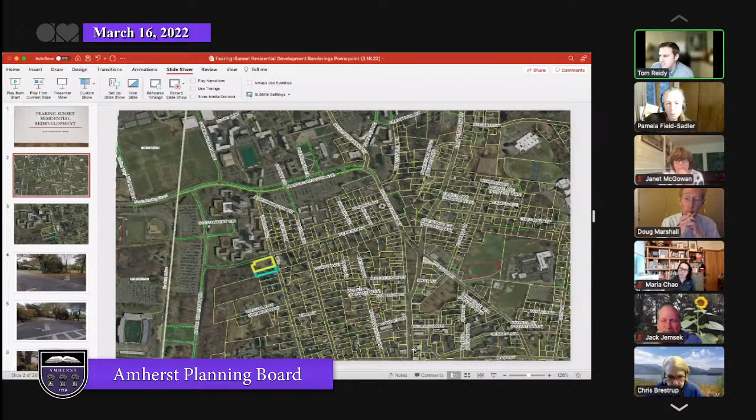Sunset, 164, 174 Sunset Ave. Just to orient everyone, 174 is the yellow highlighted, 164 Sunset is the blue. You see UMass campus here, football stadium here. You've got Kendrick Park, the Amherst College football field, and downtown is right here, just to give you a sense of context.

And then just a close-up of what we're talking about. Creamery building over here. This is, I believe, a 5-unit condominium. And then you've got single-family homes on relatively smaller lots, and it's a dense area. And then you've got the university just to the north.

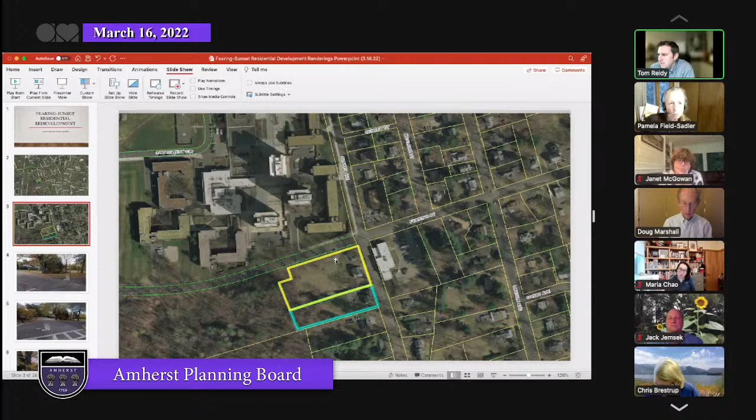Further back in the woodlands, there seems to be a lot of invasive species. There are no wetlands on the site, no wetlands proximate to the site. So we've had a wetland scientist go out already and provide a letter to the Amherst Conservation Commission and Erin, suggesting that nothing more would be needed, and she accepted that. She had been out there, or at least had done the desktop review as well.

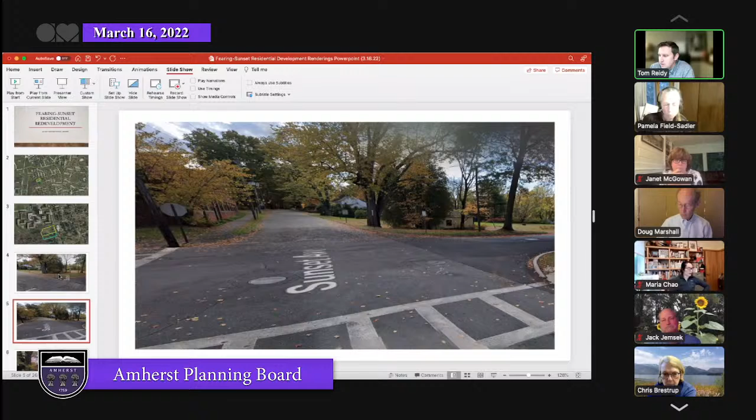This is looking northwest. So this is looking at 174. You see the towers in the background. The Creamery is over to the right of the screen.

This is taking that same position and just pivoting and looking to the southwest. You've got 164. This is a non-owner occupied rental as well.

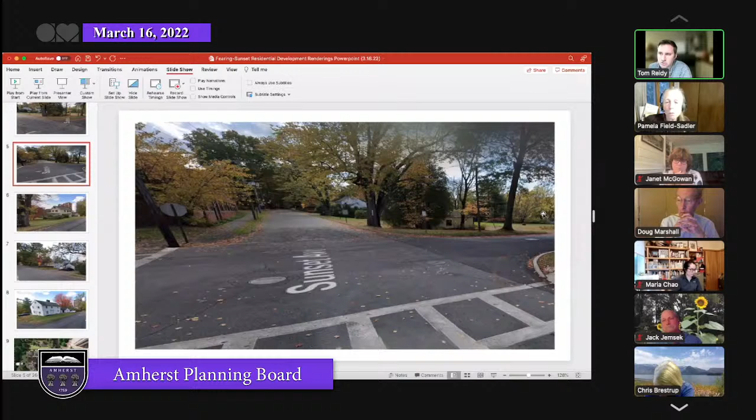This is just a little further to the south, looking northwest. You've got 164 and 174, and then you've got the towers in the background. Most of it is cleared. There's some vegetation towards the back. There are a couple of shade trees, and we're working our way through the public shade tree committee and working with Alan Snow, the tree warden.

Part of what we had represented to the local historic district commission, and which still holds true, we will ultimately be submitting for a demolition permit insofar as we're looking to take down this garage and this breezeway, and this garage, and then there is a porch on the back. We were looking to take those down or off, and then looking to relocate these houses.

You may remember Barry had moved an Amherst College house from South Pleasant Street. Its new location is now at the corner of Snell and Baker Street. So Barry would be using the same building movers to move these houses.

We haven't settled on a location yet. We've got a couple in mind. Once those become final, then we'll let the public know, because there's a lot of coordination that has to happen with the utilities, with the police, if we're traveling on any state roads, with the state police, Mass DOT, etcetera. So we haven't finalized those yet, but we expect one to hopefully be in Amherst and one to be in Hadley.

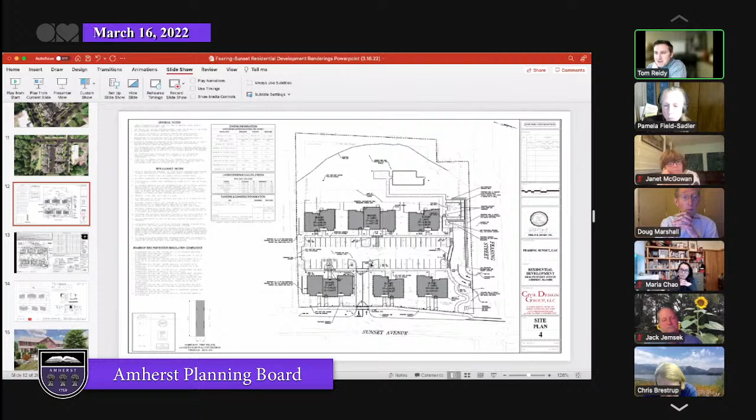I've got the site plan if folks are interested in seeing it. Compared to the colored renderings, with all due respect to the engineers who I know are here, it's a little blasé. I'm happy to dwell on it if you like.

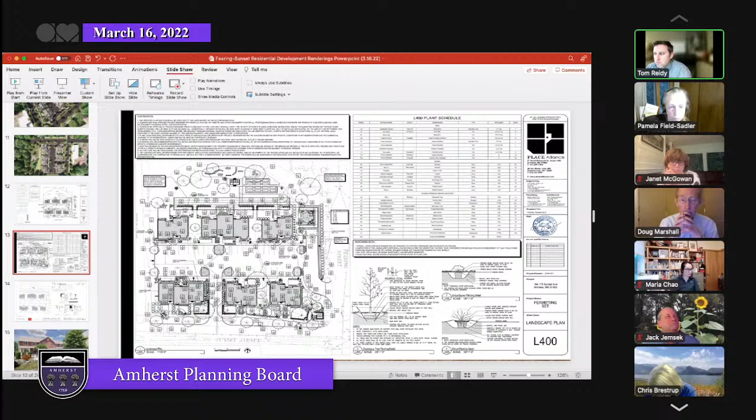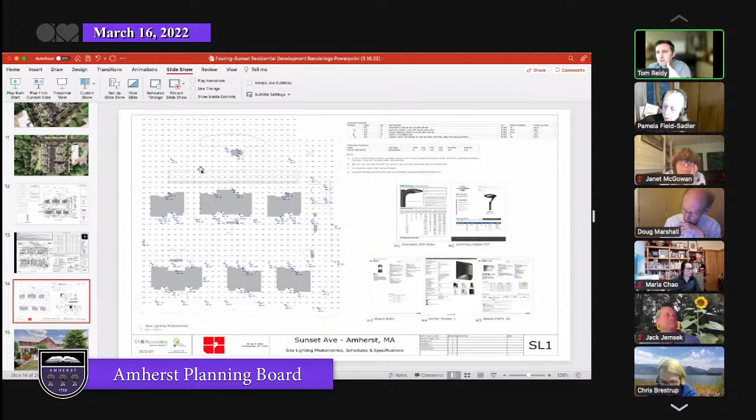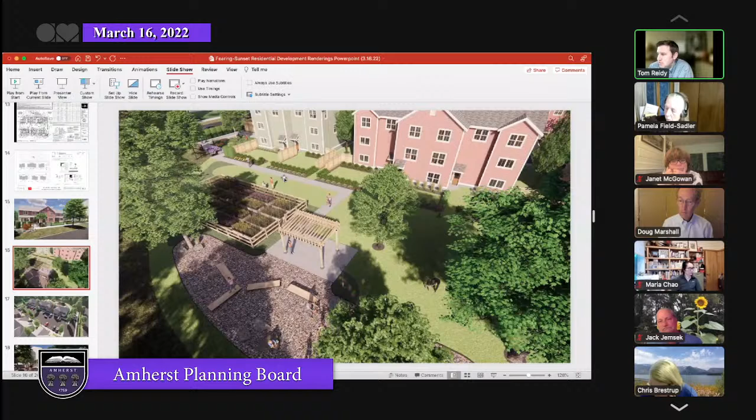Here's a view all the way to the west, looking back east. You've got that natural play area we talked about, the pergola sitting area, community space, and fences in between these units. Then some outdoor grass play area, and the backyards. To the north you can see the arborvitae and the wrought iron fence. You've got one of the parking areas, the loading area, and a retaining wall here because the site dips down from the surrounding grade.

Another photograph of that natural play area in the context of the towers in the background. Again, this one is at the southerly side of the property, along the parking area.

So the duplexes are proposed to have 4 bedrooms each. Jonathan will talk about that a little more. I mentioned that 5-unit up along Sunset—this one has 4 units. It's got a 2-bedroom above a 2-bedroom in the middle, and then 4 bedrooms on each side. The duplexes that flank it each have 4 bedrooms.

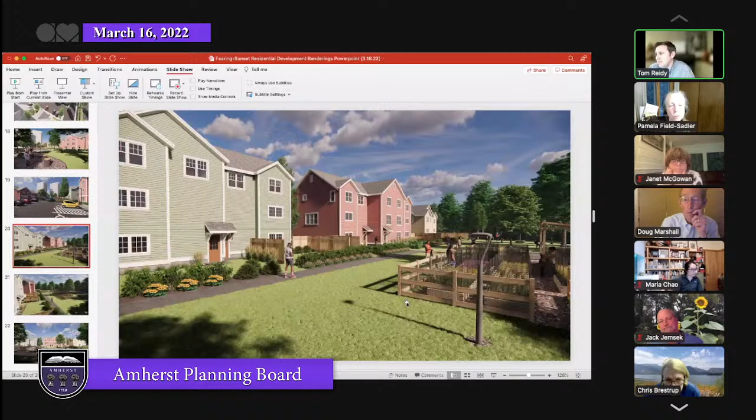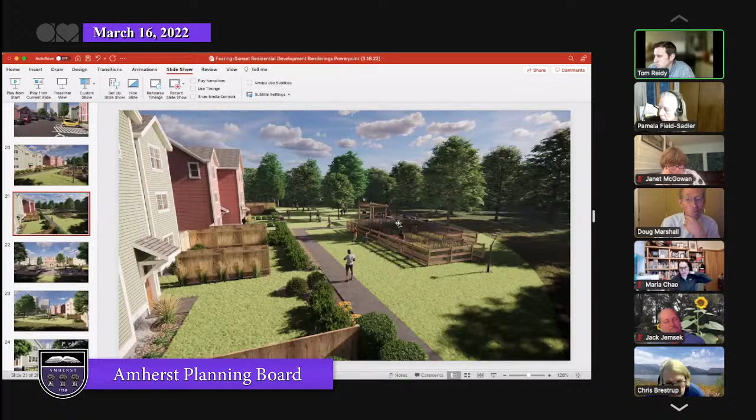Again, this is from the north looking south, the community garden, and these are the types of lights we're proposing. Looking out towards the rear there's the community garden, pergola area, and fenced-in area with the plantings being proposed.

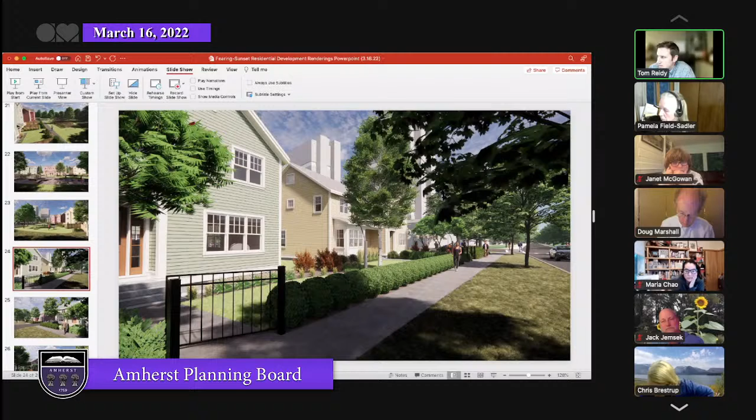This is along Sunset, and you see the duplexes, the hedgerows with street trees and the gates. This is that 5-unit, and this is one of the entry driveways. Last but not least, this is the Creamery building over here—that white blob, respectfully. And then you've got the 5-unit and those duplexes, with the towers visible in the background.

So, process from here, we're hoping for a positive outcome. We're obviously open to listen. We've put, hopefully as you can see, a lot of thought into this design. It's going to come down to marketing. We've already tried to talk to UMass, Tony Maroulis specifically, to see if this would make sense for the university—professors, administrators, etc.—to reside here so close to the university. It comes down to marketing to families, and we hope the amenities and floor plans influence who resides here. Also the materials will be higher-end. When you put that whole package together, plus the management—Barry's going to manage it—you really have a nice project, especially with some affordable units. It will increase the tax base and provide housing, which is much needed in town.

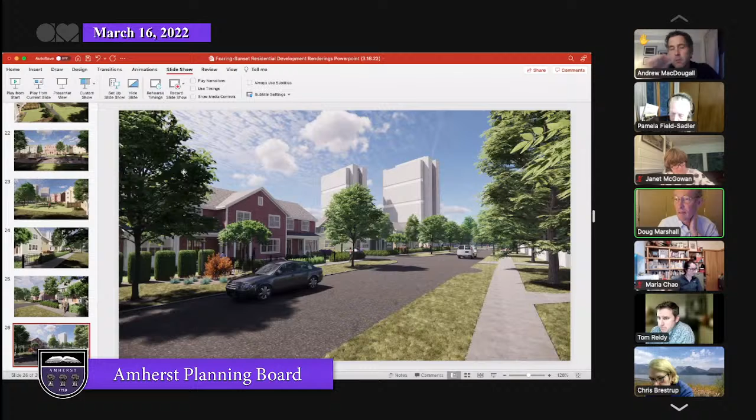Well, do you want to go through the floor plans? Sure, yeah, we're happy to. Might as well give you the whole thing. I guess I'd like to get through whatever you want to present. I don't know if Andrew wants to go first—Andrew, I see your hand. I'm happy to wait, I just had some questions relative to Tom's presentation, but now or later is fine. I have some questions too, but I think we're better off seeing what you want to present and then going through our questions.

Dive into the next piece. Some of this will be repetitive, but I hope not too overly so, as I try to pick the right thing from my screen here. There we go.

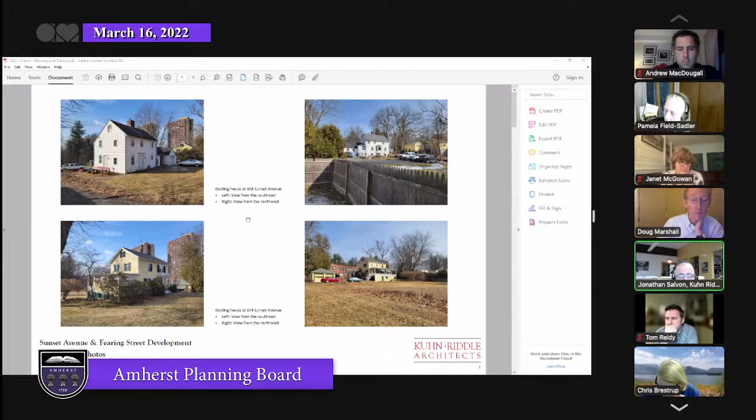Do you see some images of the existing houses? Yes, great. Since Tom covered some of this, I'll be brief. Just a couple more images of the two existing structures at 164 and 174 Sunset. I'm thinking about their scale—these houses are very common in this neighborhood, though there are also some larger homes we'll look at. This is typical for the neighborhood, and we were encouraged strongly by the local historic district to work in this kind of size, form, and level of architectural detail.

Just a couple more shots—obviously the Creamery is across the street. It's a larger building, but there are some larger homes, and these will be more comparable in scale to the two larger buildings we've proposed, the ones that are one bay bigger than the duplexes. And this last row at the bottom shows more typical character images for the neighborhood.

I'm going to go through this slide quickly because it repeats what Tom was just saying. We have 4 duplexes, these building types here, and 2 apartment buildings, one at the back and one at the front. As Tom noted, this building has a 4-bedroom, a 3-bedroom, and another 4-bedroom off the street, with accessible flat type units accessible from the rear.

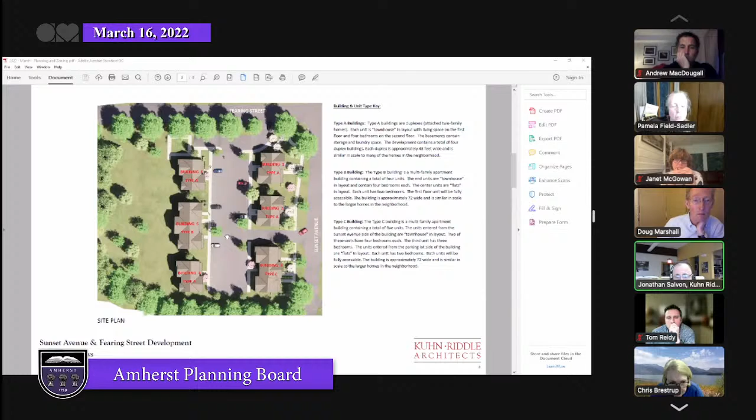And then this structure has a 4-bedroom, a 4-bedroom, and then 2 flats stacked on top of each other in the center, with the first floor one fully accessible. This really is just another image of it.

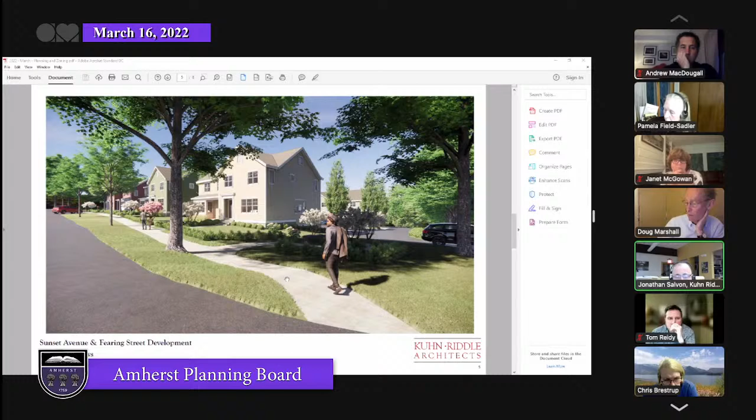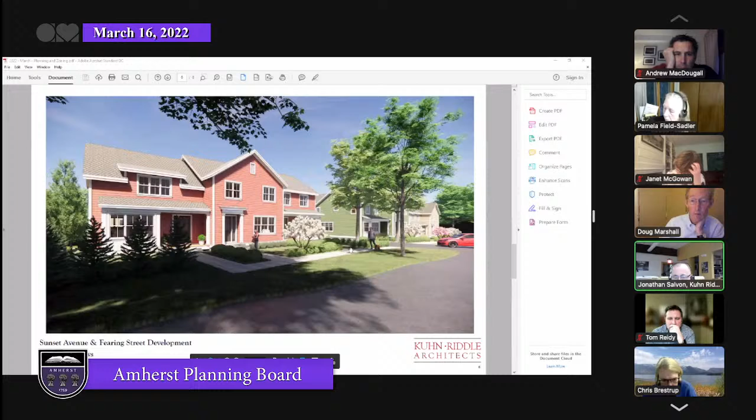I'll walk through these quickly because they're very similar, but at an earlier stage of the landscaping we don't have the trees and whatnot. But again, we're trying to evoke a typical streetscape form and language that corresponds to the neighborhood. So this is at the corner of Fearing and Sunset, and this one is at that southern end of our project area on Sunset.

And that's that larger unit, one of the two sort of apartment type units.

Just to look at them in more of an architectural elevation - I have full sets, but because they're not colored, these read better. So I want to quickly walk folks through the level of detail and architectural expression.

We're trying to do a nice higher end architectural shingle on the roof, with traditional double hung windows. We're going to vary the light pattern - some buildings have a 6/6 light pattern, some have a 1/1. We're going to vary the color, and we may also do some variants in the style of the clapboard. But final materials for some of these things haven't been picked yet.

But we're trying to pick up very traditional porch and bay elements and entry elements. And even though this is a duplex, have it read as the form and scale of a single family home.

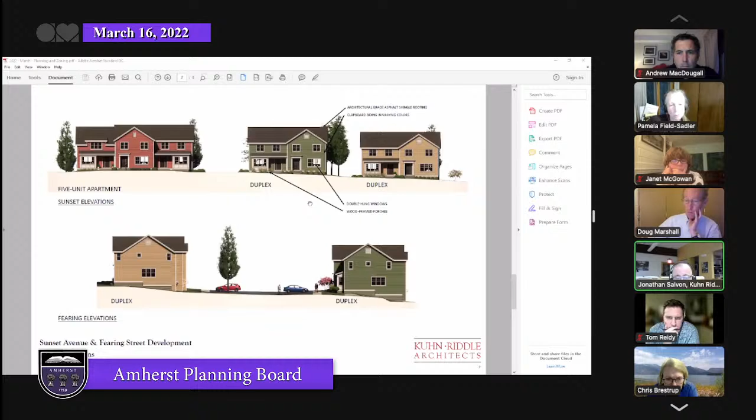Just a close up of one of these because that last page was a little far away. Again, clapboard, corner boards, a water table, a kind of trim band. This particular unit has a 6/1 light pattern.

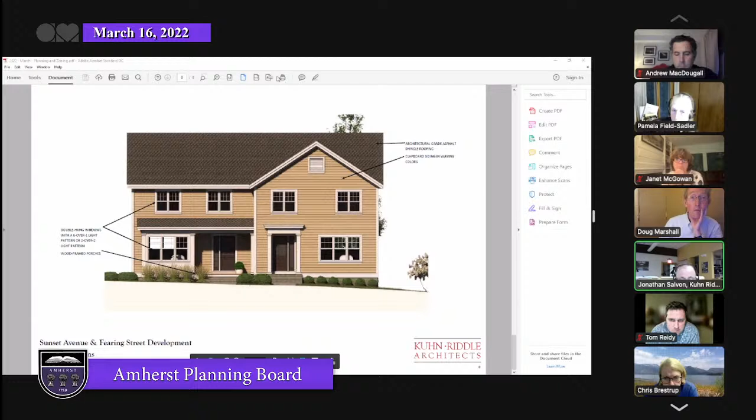So now I'm going to switch, if you can bear with me for a second, to the full architectural sets. Let me make sure I get the right one here.

So I'm going to start with the duplex units - for us, this is building type A. There are 4 of them, 1, 2, 3, 4. Folks can see that small rendered image.

And go to the floor plans. Over here on the right, we have the ground floor plan, the first floor plan. This would either be entered from the Sunset street sidewalk, or from the parking lot. The basements are mostly unfinished, with small laundry areas. The ones with the parking lot downslope could also have a mud room and a back entry, which we thought would be a very attractive thing.

But once you enter into the building, there's a closet, an open eating and living space, an open kitchen at the back, and one bathroom at this level.

And then moving up, the typical second floor plan is here on the left, with a larger bedroom with a walk-in closet, a second bathroom for the building, and then 3 bedrooms similar in size. As Tom said, some of these may be used as nurseries or as office space, but it gives people flexibility.

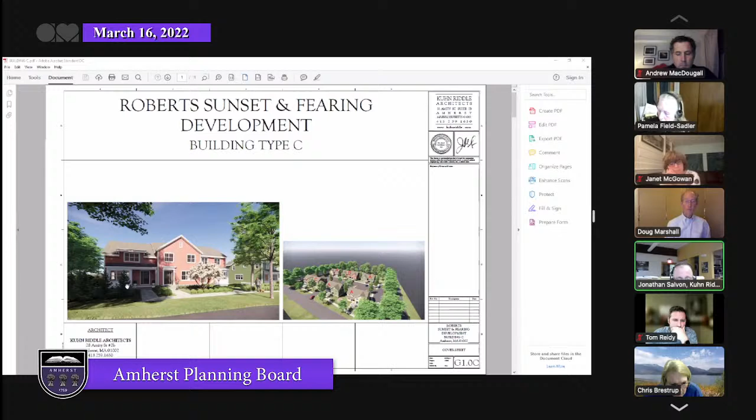Let's put up our last building type here. This is building C, at the southeast corner of our project area. At this level, they are townhouse style units. This is a 3-bedroom unit at this end, and then 2 4-bedroom units. But at the back, entered from the back, are the 2 potentially fully accessible units. Whether they'll both be fully accessible, we'll have to sort out as we move forward. But we have the potential, at least, for 2 fully accessible units at this level, entered off a common entry and with a common hallway, with that open living, kitchen, eating area, 2 bedrooms, accessible bath, and laundry facility.

Entered from the street side, again, that common townhouse type layout we're using throughout the development, with open living, dining, kitchen area, a bath at the first floor level. Because we're occupying the basement with additional units, the laundry in this building is at the first floor level for all 3 units, and again a combination of a larger bedroom and smaller bedrooms. Here's that 3-bedroom unit with a larger bedroom off the bay on the street side of the building, a walk-in closet, and 2 additional bedrooms in the back.

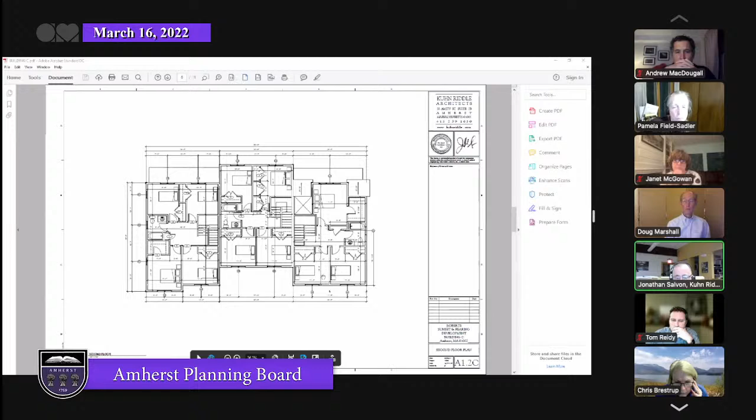And then elevations. This is the street facade with the primary entries for the townhouse units, and then viewed from the back, that's the common entry for the 2 flats located at that ground floor level.

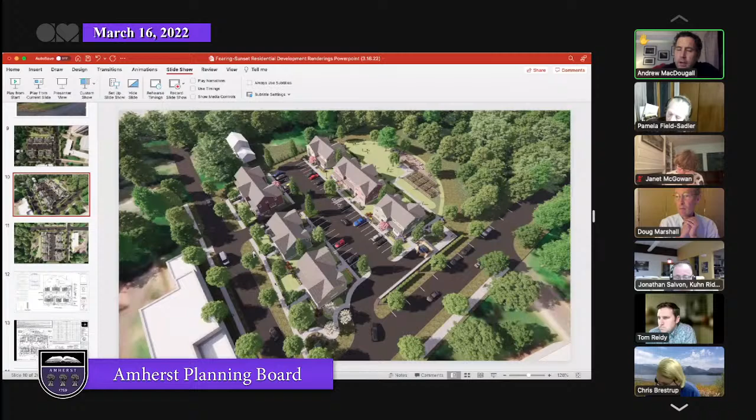So with that, a couple of quick questions. The arborvitaes, those are normally really big, like 40 to 50 feet. So what's the plan for keeping those? Are you going to have them trimmed down to what height? You're talking about along the street here? Exactly, yeah. So when we met on site,

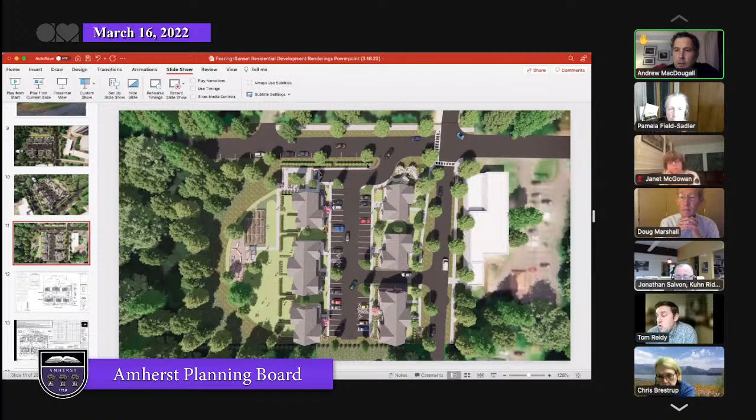I think it was with the local historic district commission, there was some discussion. I know Ben from the planning department was there. There was discussion about how the dorms act as, sound reverberates off the dorms, and it comes this way as well. So really to try to get something as a vegetative screen that grows up, so there is not only a physical separation and maybe a subconscious separation from the university and from the dorms, but also an auditory separation. So at this point, the plan is just to let them grow up.

Okay, because they'll grow huge. And I guess they wouldn't fit under those maples if those were maples there. I think you said they were existing trees over here.

Text message is a wonderful thing. Our landscape architect just texted me and said the ones we have proposed max out at 20 feet. So those are the ones he's called for, with a 20-foot height maximum. Okay, but so still a pretty big visual barrier. Correct.

The other quick question I had, I noticed you specifically did not mention anything about students. Is the objective here that you will not allow students in? No, we will. One of the things I've talked to Barry about is the dangers of trying to prohibit students carte blanche, saying no, students aren't allowed. Anybody who's responsible is welcome to be here.

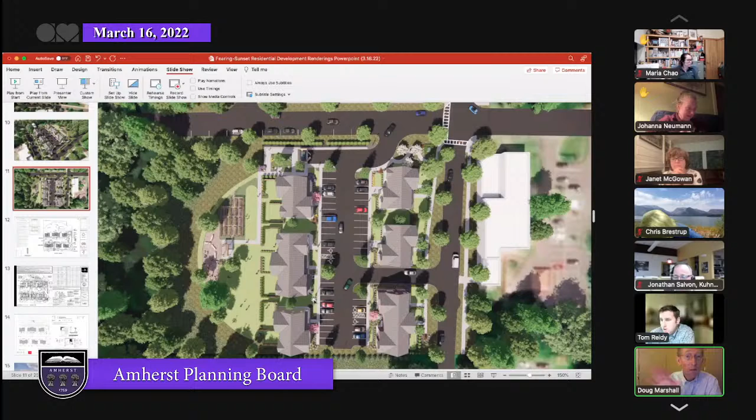All right, that's both of your comments? Yes, that's it. All right. Jonathan, I don't know if you need to respond to that, but this would be a good chance if you want to say anything. Otherwise we can go on to Maria.

I think that's something we should give a little bit more thought to. We have provided pathways, but if you're in this corner unit—you can't see my mouse, thank you—if you're in that unit, you have to cross certainly a parking lot and maybe a driveway to follow the path we've designated. And as we all know, 3-year-olds don't necessarily do that. It looked like in the description you actually have more parking spaces than required, so you could potentially lose a space on each side of the bay and have a little more connectivity.

That's true. Tom sort of talked about the number of parking spaces, but we didn't really talk about that parking density. I don't know, Tom, have you and Barry talked more internally about what the right number is likely for this development?

No, frankly part of it is to see what the feedback is, like planning board feedback, zoning board feedback. Sometimes we've been through this enough to know some people say one thing, other people say the exact opposite. So if we design it with the parking we can fit, and then we hear, hey, on balance this is really important to us, why don't you get rid of 2 parking spaces? I think we could see our way clear to eliminate 2 parking spaces to have that thoroughfare. I don't see that as an issue, but if I hear from the ZBA that they want every parking space we have, then to a certain extent we're the pawns in this.

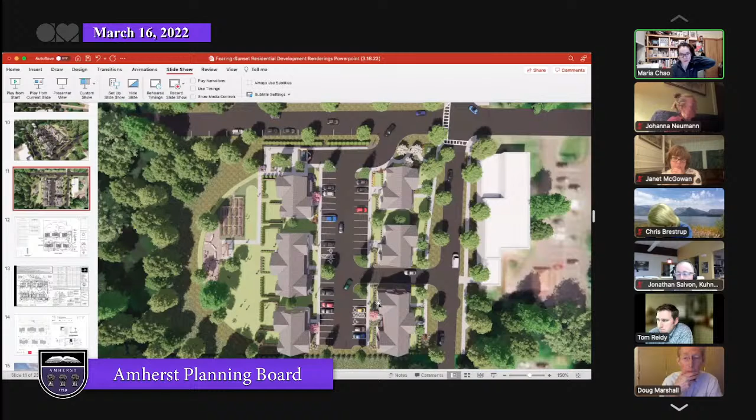Thanks for the presentation. I just want to start with big picture stuff. This project really shows how effective our zoning is, and how the various departments, developers, planning board and building department all working together can create this great project, because we so need housing. This is that missing middle flag I've been carrying for my term on this board—this is exactly what we need. We need this sort of starter home, this missing economic community that has to move outside of Amherst in order to work in Amherst. I think this is the thing we need, and we need more of it. It's great that you found this parcel, it's such an ideal location, and to do this number of units that transitions between the scale of university to a neighborhood—I think it's conceptually fantastic. I won't comment on the architecture because that's so subjective, but I think it fits the neighborhood just as you designed it.

I'm glad we're talking about this issue of pedestrians and cars, because I do feel like the project is very car centric. It feels very much about, we have enough parking, and in fact here's more parking, and here are 2 ways to get in and out. It does feel like there's a lot of accommodations for cars.

And like you've heard from the planning board members, how do people move through the site, from their front door to their car? Or how does a child get from their front door to the community space? I think that's really good feedback to think about, how a human from each front door occupies it and walks down a street, whether going into town, to their job, or to that really great green space you provided. So those are big picture questions which don't need to be answered, just to think about.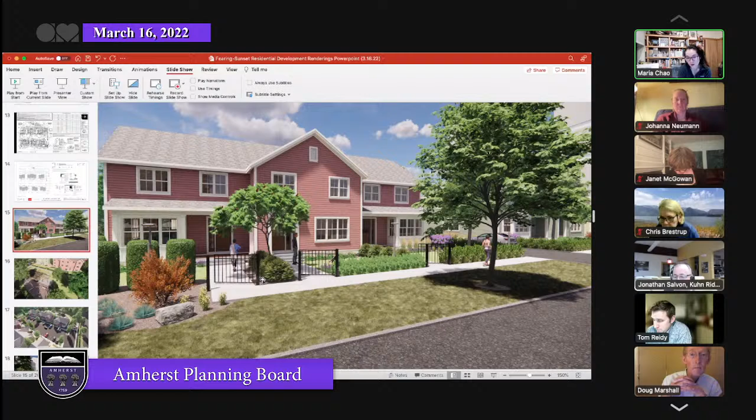But yeah, I know, I think we need more projects like this. This is fantastic, and I'm glad it's gone through iterations and you've really responded and taken input from the various boards and department staff and whatnot. And I think the only criticism I would have is really think about how people of different ages and abilities move through the site with their feet, literally, and I would definitely be pro reducing parking, considering the location and proximity to university and downtown.

More green space, more sidewalks, less cars. The more you push toward that as a trend, the more we as a community can think that way too, instead of predominantly relying on the car. But overall, I kind of echo what a lot of other people have said about this project. I think it's great and really well thought out, and I hope we see more like this.

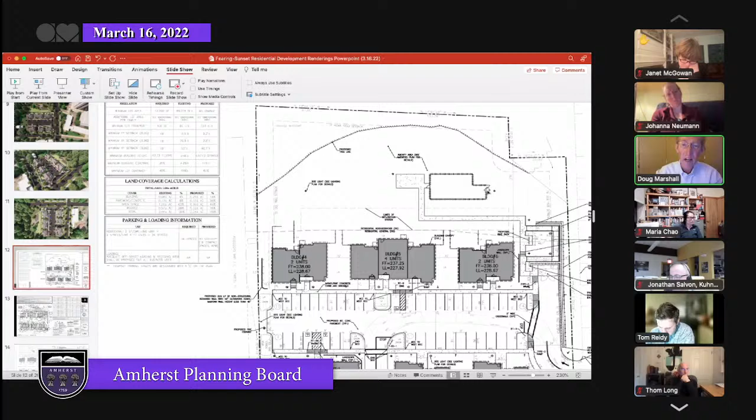And then I guess the last comment was about the semicircular grading at the west edge of the site, which, Jonathan, I realize is a very steeply sloping site, and ideally it would be flat, but you've sort of tabled it, stepped it down toward the west. But just looking at the number of topo lines on that semicircle, it feels like almost the prow of a ship jutting out to the west. So it felt like, between the retaining wall and this grading to the west, I think there was some mention that you were doing a lot of fill.

And I can imagine you're trucking in a lot of material. But I felt like, on balance, we are filling a lot. It just kind of felt like maybe it wasn't as... could we soften it a bit so it wasn't so abrupt? It felt a little heavy-handed in terms of the treatment of the site.

And I think part of that was my thought that if you had a building or two that stepped down Fearing Street, you wouldn't feel the need to have it flat quite so far to the west. But I realize you've been through a lot of hoops already. I do think it's an attractive project. Take my comments for whatever help they can be. So maybe I'll stop there.

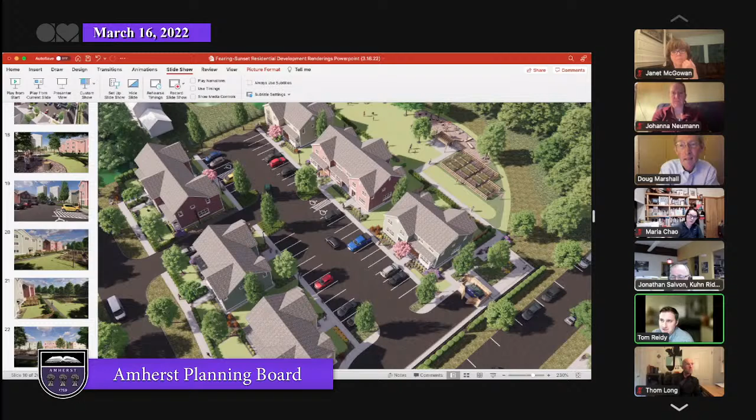This is a higher level of modeling than I think I've seen on the board, and it really helps you get a sense of what you're trying to do. Let me give credit to Place Alliance, Andy Bone, a local Amherst guy on South Pleasant Street - they're our landscape architect and have done a terrific job. Between Jonathan at Kuhn Riddle, Phil and Matt at Civil Design, and Andy at Place Alliance and his team, we've got to thank them for what you're seeing tonight. I can't take any credit for modeling those gardens in the back - that would have taken me forever. Buildings I know how to do, but getting the plants to look natural and beautiful, that's why we have help.

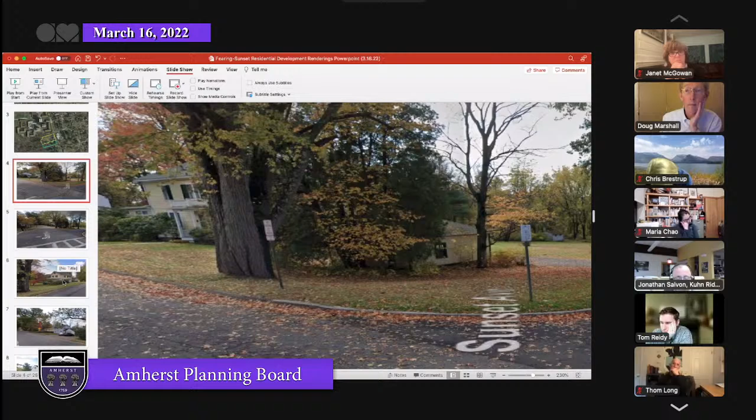I did have a couple other questions and comments. On the parking and children's safety issue, there's an alternative where parking could be in the back where the common areas are, and the area now used as a parking lot between the buildings could become a common green area. If the building is rented, as Lawyer Reidy is suggesting, to families and responsible people, that would work out fine. I do know large common greens aren't wanted if a building is primarily undergraduates, because it becomes an incredible party space. In answer to Johanna's question about canopies, if the parking were in the back and canopies come down, or it's less expensive to build them in the future, that's a possible source of energy there. I was also very interested about the affordable units, and I'm pleased to hear about the accessible units. I'm wondering if one of the affordable units will also be an accessible unit, and if there's a possibility of seniors as well as young families living there - if I were a senior living alone, I would want to live in a place like this with varied ages and children. It would be very attractive.

I also have a question about the laundry room - I couldn't quite tell whether each unit had a shared laundry room or individual laundry rooms. And I want to know about the dimension of the common space - I just couldn't get that from the plan. It could be really great, or it could be a suffocatingly small room where you're trying to do too many things. So I'm curious about the answer on the laundry room and the dimensions of the common space, and any comments about the tree. Thank you so much.

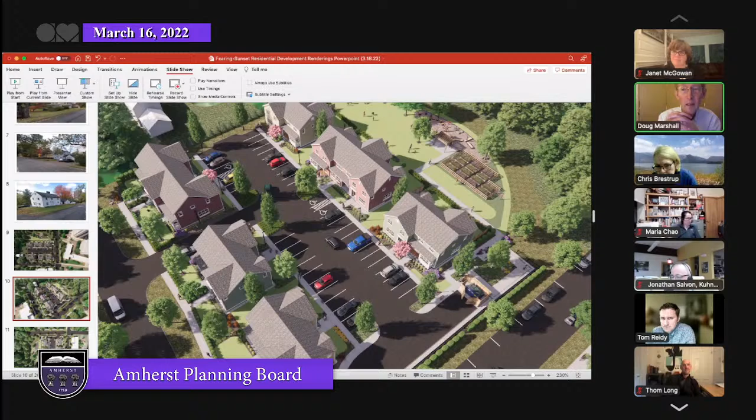I think the one comment I would want to make is that the comments should be indicated as individual comments, because we haven't really had enough discussion to have a sense of which comments are shared by the board as a consensus. So these were the comments from individuals on the board.

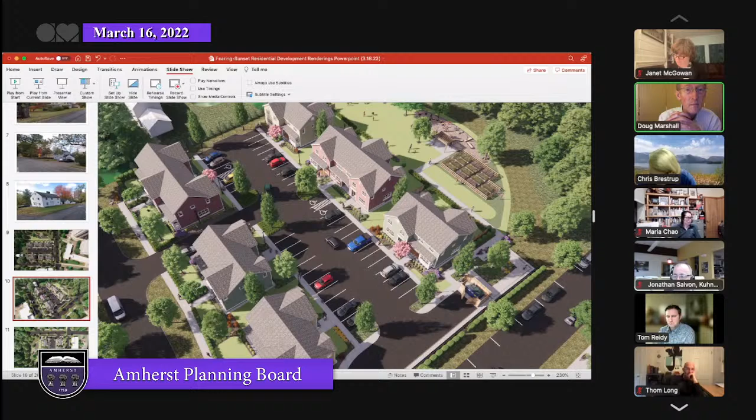Okay, all right. Well, thank you, Tom and Jonathan and your teams. This was great to see, and it's certainly a pleasant, happy project to look at, and sounds like you've been to enough of the other boards that you're well on your way. Thanks so much for the good luck recommendations. Good luck with the ZBA. Thank you, thanks very much. Good evening. Okay, so long.

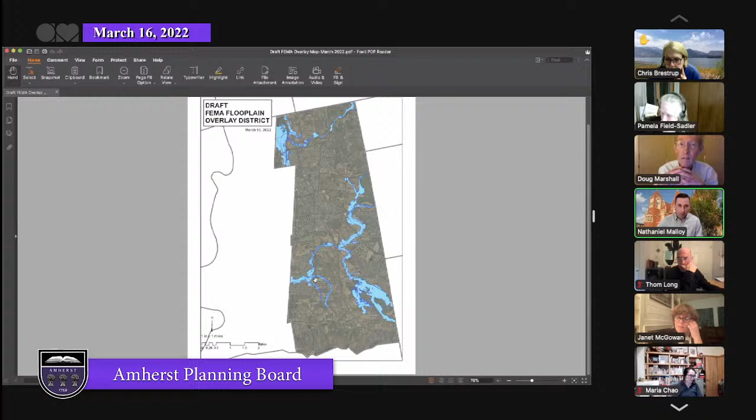So if that's a possibility, I'm going to zoom in quickly here to North Amherst. In this area, the FPC comes a little bit over here in this U shape. This area is FPC. This side of the road is one zoning district, over here it's another zoning district. So if we were to remove FPC, and there's this little gap here, what does this become? What zoning district? There are two different zoning districts encompassed by the FPC right here. So does one half of the road become commercial and the other half become residential? There are probably hundreds or thousands of cases where this new boundary and FPC don't align well.

So I think it becomes a much bigger project to say, well, let's get rid of the FPC. The FPC also has some conditions and regulations in it that might be more strict than what FEMA does or doesn't allow. So then we'd have to consider, would we want to take some of those conditions and put them in this FEMA overlay?

May I say something? Oh, sure. So I want to look at this map and go up north a bit. I'd like to say that I did not curate what Janet Keller sent to you, I just sent it to you. So there may be some misunderstandings on her part about what is and isn't shown on maps.

This map clearly shows that parts of the Mitchell Farm are in the floodplain. The floodplain pretty much goes all the way from very close to Cowls Road, and it goes all the way up to the Sunderland line. Mitchell Farm is somewhere in there.

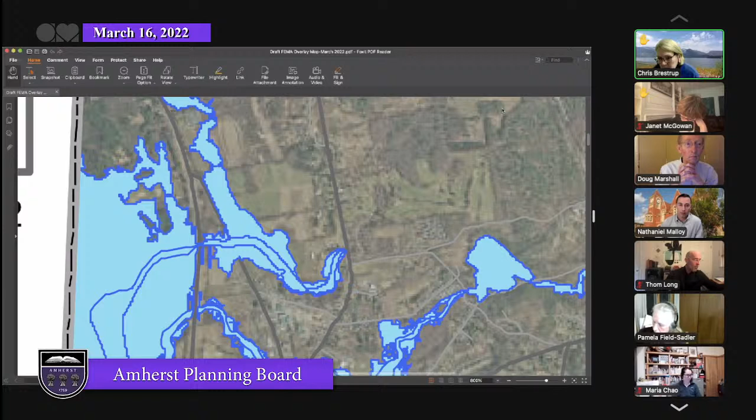So I would encourage planning board members who are really interested in this and want to get into the nitty-gritty details to make an appointment to come in and meet with me and Nate. We'd be happy to meet with you individually, or meet with two of you at a time, and scroll through the maps and go through the process we went through to get here.

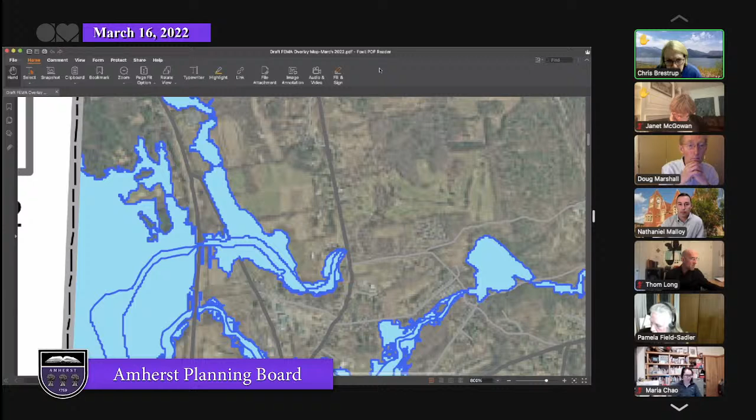It's really important to get this set of maps approved by the end of the 6-month period. If we don't, the town will be out of the flood insurance program. We've been working on this for 10 years, as I said, and we think we've got a pretty good set of maps here. If people are really interested in getting into the details, we're happy to meet with you and talk about them.

We will also be calling in our AECOM technical expert or consultant to attend the meeting with the town council, and then again to attend the CRC public hearing and the planning board public hearing, so she'll be able to answer questions.

As I said, we're not trying to change anything about the FPC. We understand that the FPC is near and dear to many people's hearts, and so we felt it was not appropriate to try to change that at this time. We're just adopting these FEMA maps to replace the FEMA maps we've had since 1983.

So I don't want anybody to be fearful that we're somehow trying to change something in the FPC zone, because that is not true at this time. And again, I encourage you to call us and come in and meet with us, and we'll show you the maps and go through the process and try to make things as clear as possible.

Thanks. I think just quickly to Andrew's point of seeing what's changed, we had an interactive online map that showed what's being added and what's being removed compared to the old maps. And we've gone a few years of getting updated preliminary maps, and IT hasn't done that. I guess it's a fair amount of work. So there's been discussions about getting that back online again, just so anyone could go there, and it could be part of a presentation too, to see, okay, these areas in red are being removed, here's in green are being added, and then here's what stays the same. So we had kind of 3 categories, and it was a really great visual to see the changes around town. And it was an online map. So that's something we can talk about trying to get going.

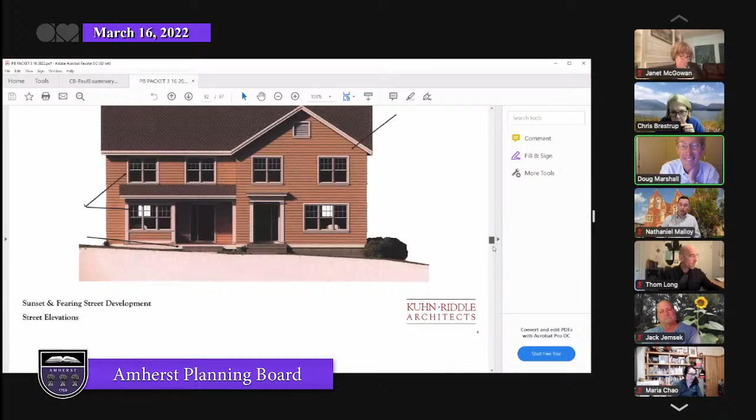All right, so I guess I do want to make sure I'm not the only one that thought this was interesting. Because if I am, we can just keep going.

Andrew, I also thought it was interesting, and I was generally encouraged by it. I was expecting something that might have been a little more critical, but the general tone was that it's pretty well organized. We seem to be pretty systematic, but there are some areas which could use some clarity. I think that's not surprising.